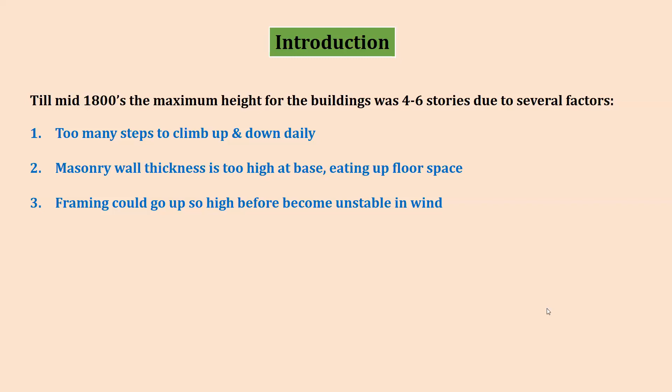So if we target these three things, it was really a challenge for them. But thanks to the industrial revolution, which happened almost 150 years back, these two gentlemen actually initiated the process.

The first one is the Bessemer process, invented around 1855, which induced the industrialization of steel production from pig iron. Steel is a better material from the structural stability point of view, so we can think of an RCC or steel structure which can now go a little higher without compromising the thickness at the ground level.

The next one is Elisha Otis, around 1857. He invented the brake shoe of the lift. The lift was already invented, and he started a company called Otis Elevator, which is still alive. Now the elevator is in practice, and it gets rid of the problems of climbing up. As steel came, better types of glass also came as a byproduct of the industrial revolution, so framing glass even at high levels won't be a problem.

So these two inventions ignited the possibility of the high-rise building, and by virtue of that, around 1885, about 30 years down the line, the first so-called high-rise building came up in Chicago, which was a 10-storied building, 42 meters in height.

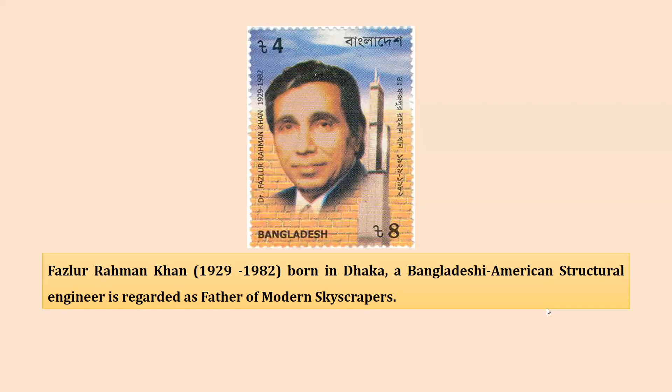In the 70s, when there was a boom in high-rise buildings in the USA, he developed the structural concept which was the fundamental concept of high-rise building structure. Fazlur Rahman Khan, F.R. Khan. This is a kind of postal ticket which the Bangladesh government developed in his name.

If you see the height of the building increase, the structural steel required to take care of the gravity load increases in a linear manner. So if you increase by 2 floors, whatever increase occurs, increasing another 2 floors gives the same amount of increase. But it is not true in the case of lateral load. It increases exponentially after a certain height, and it will take over as the dominant factor between these two. Fazlur Rahman Khan called this excess amount of additional steel required to take care of the lateral load the 'premium for height' — you have to pay some premium because you are going high.

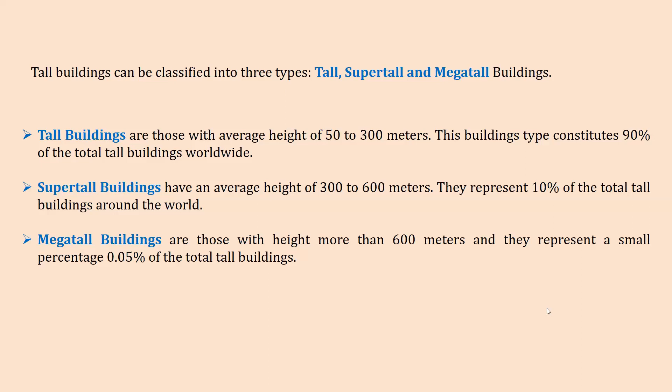So what happened is that in the past 120 years or so, there was an array of modifications, an array of inventions, and an array of influencing factors which actually boosted us and are responsible for the growth of tall buildings.

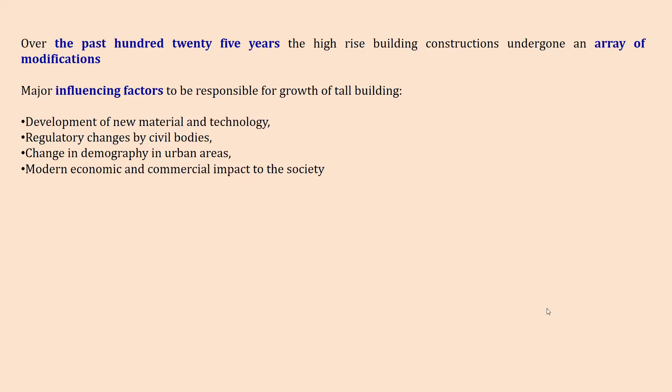We have developed a lot of new materials and technology. Regulatory changes in civil bodies also gave boosting to think for high-rise buildings. The change of demography in urban areas means we need a lot of buildings, and urban areas are spreading out. The city core areas now have very high land prices, so the character of the building is going to change. The modern economic and commercial impact on society also impacts this. Per capita income is increasing, especially in urban areas, so that is another cost people can afford.

The other important point is software technology development. The recent advancement of software technology, particularly in designing, modeling, detailing, and management. Tall building design is not a joke—it's not like hand computation can handle everything. You need a reasonable kind of software to develop these designs, then go to simulation models for wind load and other factors. These are now available, so you can do a lot of exercises and then go for the best performing option.

Now let us go to my part, the services principles, and how we are going to think about this. One major point is that the design of a tall building is group work. A conceptual development can be generated in the architect's office, but it has to be vetted through the structural counterpart and also the services counterpart. Then again, rethinking and re-evaluation is needed. This cycle goes on for several more times, and then the particular building can come up. That is the first very important point.

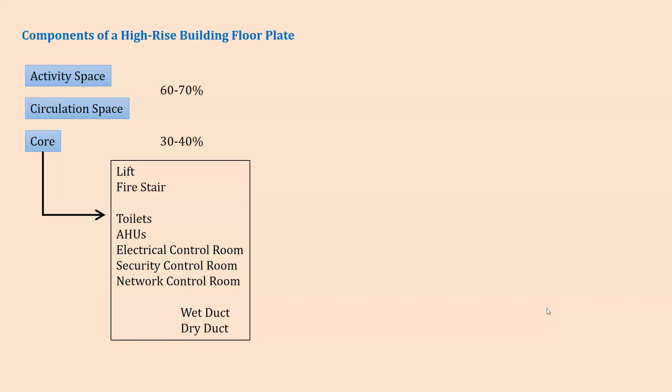Now in the core, we will try to put the lift, fire stair, toilets, AHUs, air handling units, electrical, security, and the network control room. These require some kind of vertical transmission, so we need a wet duct and a dry duct. The wet duct takes care of my sanitary and water supply pipelines, whereas the dry duct can take my HVAC, electrical, and network cable. So like that, we have to design.

Now, if you see this core, for all the items you first have to find out how much area will be dedicated for each item. For the lift, suppose, then we need to know the occupancy, the total height of the building, what will be the speed of the lift you are designing for, and what will be the cycle time.

So like that, we have to actually see what is the waiting time and all. Then we may go for 3 lifts, or maybe 6 lifts, 8 lifts, something like that. And once we know the dimension of a lift, we can find out how much area is required.

Similarly, the fire staircase is also governed by the bylaws. Number of toilets is also governed by the bylaws. AHU will be governed by the cooling load that is required, so from that we can have some kind of idea.

Maybe the security and network rooms may not have any bylaws, but a tentative dimension has to be fixed for them because it is something like a room, and there are instruments, cables and all these things that have to be housed.

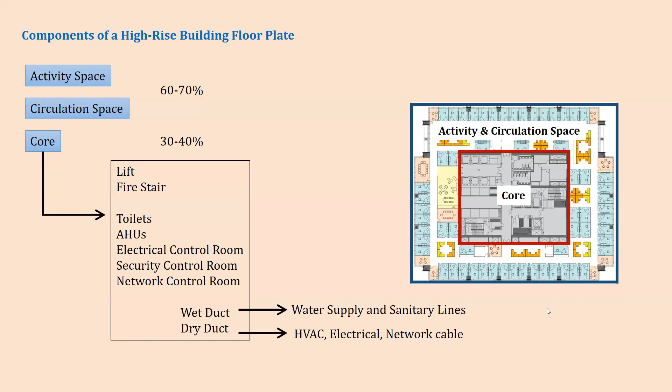Because I know my plot area, I know my FAR, so I know how much square foot or square meter area I can build, and I know how many floors I want. From that it's a calculation, and then I will deduct the amount of core which is necessary for a high-rise building, and then I will be left with the activity areas, and then I will start thinking of the shape and other things.

Next, I prefer to first design the core of the high-rise building because that is very much governed by the FAR, which gives me the total height. From that I take 60% as my activity area—office space, hotel space, apartment, shopping area, business area, or whatever. Then I know from the guidebooks what will be the total population.

So from that I can understand what will be the number of lifts per floor, how many occupants will be there, and how many toilets will be there. So like that I can actually design. I can make some dotted line grids, and by virtue of that I can place something.

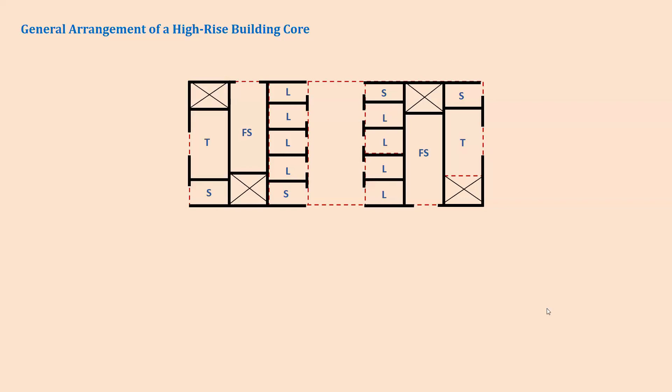Yes, this can be my lift, core and other things, and then I decide that this is my T, which stands for toilet space, S stands for services area—I may give some electrical room, HVAC rooms and all these. L stands for lift, FS stands for fire staircase, and there are some passages. Then I decide these are the dry duct and wet duct, and the wet duct will definitely be very near to the toilet.

The dry duct will definitely be in between the service spaces like electrical service, HVAC and other network services. So we first design it, complying with the space and number of lifts through logical understanding and calculations, and then we start thinking of designing the activity areas and the circulation area.

In the general layout of the circulation area—sorry, this is supposed to be the core area, just demarcated as the red area, as the core and the services and the lift. The blue one is the wet duct and the yellow one is the dry duct. Then I need some circulation area, which I've shown in green.

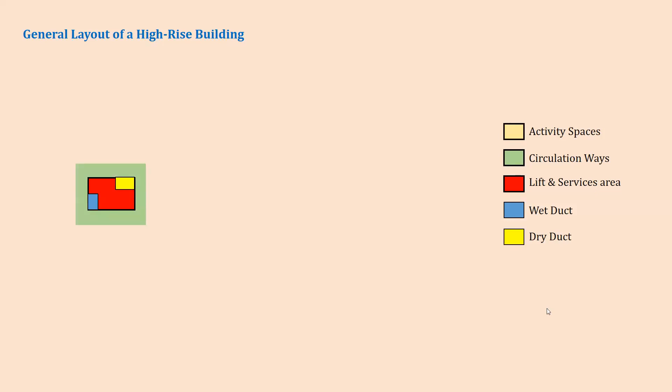Then I have some outer area because that is my maximum floor plate as per my FAR recommendation. So this is the activity area. And then I may need some more circulation space because I want to make it into four different parts for four different offices or something like that. So gradually I will go like that.

So I'll go like this, I'll design this one. I know this much of the circulation corridor is required—this I will get from my FAR calculations. And then I need this kind of circulation.

Sometimes, maybe in some floor, I may not need this thing. Maybe I can get rid of these two, only these two will be there—okay, fine, because this is too large an office or whatever. Like that, I can now change accordingly.

So like that, I can have a single core, single kind of thing. I may have a double core system if I want to have a rectangular kind of thing. So the general layout is now possible. Now this way, gradually I can develop it.

So in our course, we used to give the students something like this after teaching this much portion—we give a small class exercise. You are given a plot, suppose this is an office building, and this is the FAR, and you need to go this much high, maximum height is this, and then what should be your concept of the core, how much is your activity area, and how you stagger things. This can take around 3 to 4 hours; sometimes we dedicate a weekend and start giving them this kind of small exercise.

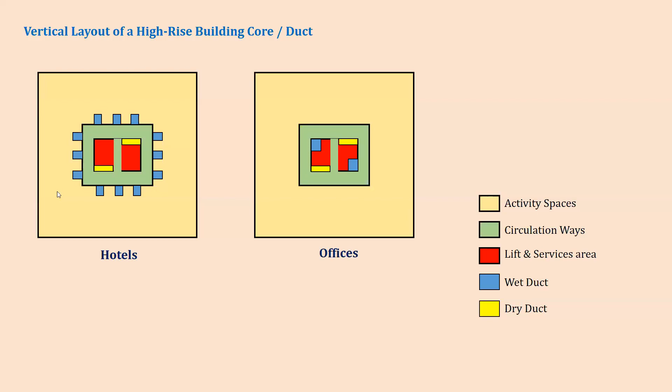So now the problem is, if I go to the next slide, I'll find a problem. If this is the hotels, my section of the building will look like this. You see the blue ducts are at the end, the fag end.

Now if I have the high rise, the upper floors are of the hotel, and the lower floors are of the offices. So the blue ducts are something like this. The upper 5, 6, 7, 10 floors are the hotels, so the ducts will be perimeter duct, and the offices are the central duct. Something like this. Or it may happen because of a change in the character of the high rise.

If it is a mixed use kind of thing, how do we do this? We have to actually introduce a gap between them, and then take the duct by virtue of some kind of horizontal movement and then connect it to the central one. The perimeter will connect to the central one, or sometimes the reverse, the central one can be connected to the peripheral one.

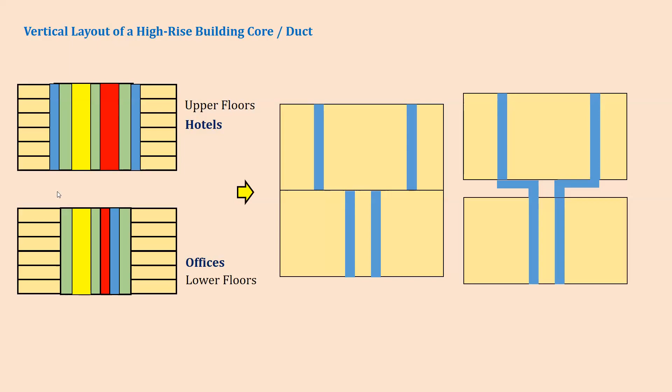And this is called the service floor. We need to have some kind of service floor required in this particular case. Even though suppose all 40 floors are offices or all 40 floors are hotels, still you require, at regular intervals after 15 floors or after 10 to 20 floors, maximum 20 floors, a service floor is required.

Because pumping the water from the ground level to the 40th level is not that easy. So you have to pump at different service floors, and each service floor will give discharge to the lower floor by gravity.

That's number one. Number two, suppose you think of a wastewater pipeline and you flush your toilet from the 40th floor, and the water passes from the 40th floor to the ground floor. Can you imagine how much pressure the water will have? It will burst at the ground level.

Because of the gravity, it is actually coming down from a 40 floor height, 40 into 3 or 3.5, almost about 120 plus meters. So what will be the velocity of the water at the ground floor? Very high, and because of that it will thrust and break the pipe.

So you need to actually take the water down 15 floors, 20 floors, and then have a kind of chamber which will take the flow in a horizontal movement. The velocity will go down, and then it will flow and overflow again. Like that, we have to step down the water and go on.

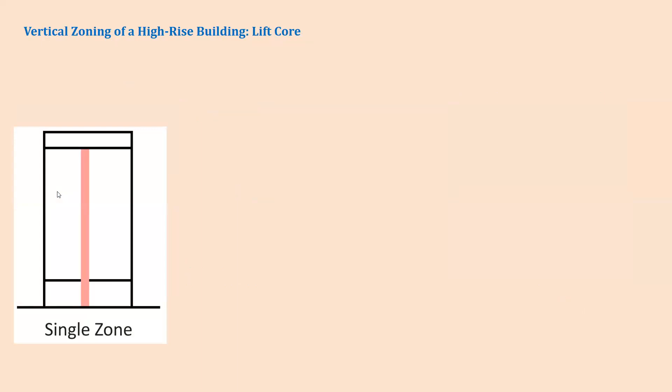In case of a lift, it can be of different types of zones. You can divide it into a small height or the regular 10 floor, 15 floor building with a single zone. In case the building is more than that, you can have two zones of the lift, because one particular lift will take too much time to climb to the 40th floor or so.

But in case of a tall building, we may have multiple zones. So multiple zones are there, just like we take an express train to go somewhere and then take a local train to go to a nearby village. Something like that, we can take an express lift to go to the 20th floor and take a local lift to go to the 23rd floor.

Something like that can be arranged. So there is a non-stop lift from 0 to 20 or so, and from 20 to 40 there are two such non-stop lifts. If you want to go to the 26th floor, you take the 0 to 20 express lift, and from 20 to 26 a local lift.

So in this case, there is a kind of dedicated interchange lobby, where the change from the express lift to the local lift happens. That particular zone is called the sky lobby. So the sky lobby is also important.

If your building is so high and you are designing a lift, first definitely we'll try with a two zone or single zone scenario. Sometimes it fails because of the waiting time and occupancy load, so the cycle time becomes too much. So we have to break it into different zones, try 2 or 3 alternative cases, and then take the best one. So this is the sky lobby.

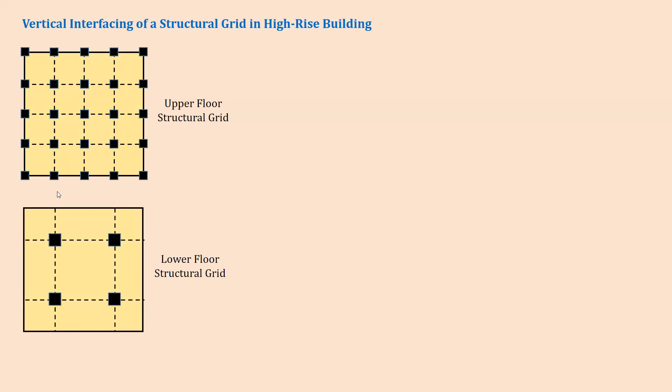But in the lower floor I may not require that. I may have large banquet halls, or maybe auditoriums or large offices. So my structural grid will be different, maybe the thickness of the column may increase, but there is not so much of the footprint, so then again the same problem occurs.

So there are so many columns in a group of floors, and in the lower floor there are only four.

So here we need a particular floor where those columns or structural footprints transmit the overall dead load to the next layer by some kind of a deck or girder to the next layer. This intermediate floor has to be constant, and it is called a transfer floor because it transfers the different loading pattern up and down through a particular girder.

This is required in tall building design because most tall buildings are mixed use buildings. They have different structural footprint requirements we have to take care of, since we cannot take the same structural footprint all the way from top to bottom. So you need a transfer floor.

A sky lobby and transfer floor can be the same, but by definition they are different. A service floor and a transfer floor may be the same too - no issue, because I can have the typical height requirement and in the transfer floor the beam depth will be a little high, but the area in between two beams I can use for any service requirement like horizontal pipe bends, water pump stations, and HVAC units. By definition they are different, but both can be clubbed together. That's why I need frequent interaction with my structural associate and my services associate to design these things.

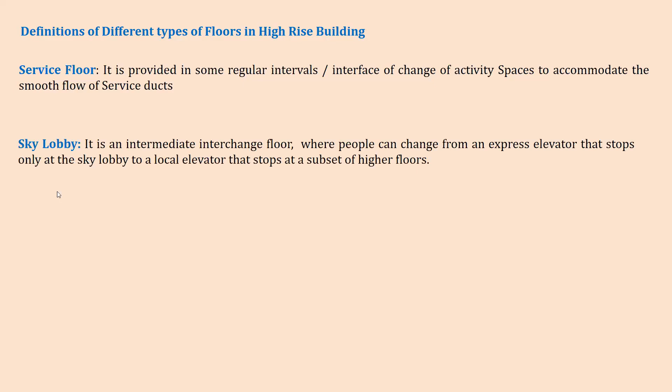The transfer slab is also a kind of floor system which supports the vertical as well as the lateral load balancing system to two different structural grids.

There is also another floor called the refuge floor. It is a dedicated area for emergency gathering, particularly in time of fire, so people can rush there. In case of fire I have to take the fire staircase, but it's not possible to run down from the 40th floor to the ground floor at once. So I may come down from the 40th floor to the 35th or 32nd floor, and that floor is a refuge floor - an evacuation gathering space which is fireproof. It is also required.

So these are the four such spaces, and there may be various permutations and combinations possible. Now if you see the core configuration and tenant distribution, it looks something like this. You can have a central core, which I discussed earlier, or a split core with two parts of the building, or an end core at only one end of the building, which is very efficient because the whole area can be used for rental space.

We may also have an atrium kind of core, where there is a central atrium and the core is actually in the atrium. You can have a single tenant, a double tenant A and B, or multiple tenants A, B, C, D. So you can make different types of groups and arrangements, and your circulation space can also be arranged accordingly.

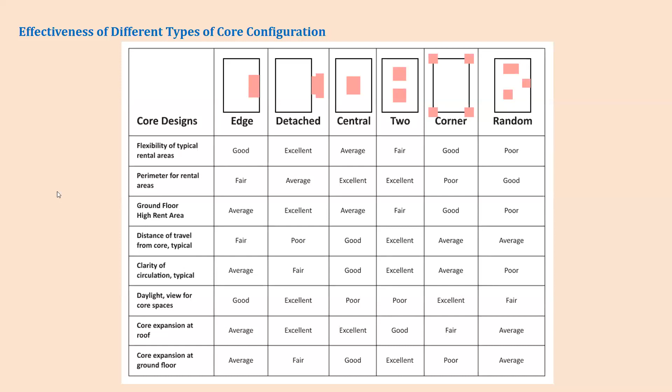The ground floor high rent areas, the distance travel, and all those factors - excellent, poor, fair, and average grading can be done. We can discuss this with our students so they can see which particular core system they may choose, from the structural benefit and from the architectural designing of the spaces. Suppose they go for the corner core - then the perimeter rental areas are kind of poor in that sense, or maybe the core expansion at the ground floor is also very poor. So that way they can choose any type of configuration for their design.

Now let us discuss some of the structural systems of tall buildings, because the structural system is another important point which may not come under the services, but it will decide your total configuration and the services systems also. Sometimes you need a typical type of structure, the shear wall, or some other type of system which is mandatory to provide, where there can be a conflict between your service core and the structural system.

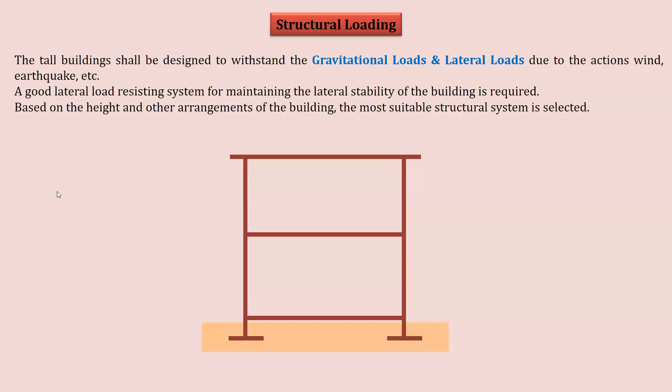As we all know, the building is going to have dead, live, and some kind of wind or lateral load, or maybe earthquake. Wind and earthquake we call lateral load, and dead and live we call gravity load. From the structural point of view, if we see a tall building, it's like a pendulum, or it can act as a cantilever beam supported at the ground. So we need to know how much is the lateral sway, the induced vibration. Both wind and earthquake are time-dependent loads, so there is going to be vibration - you have to see how much is the bending, how much is the swing.

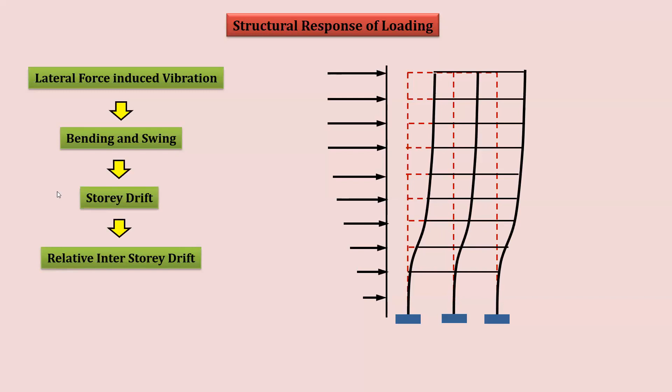We may not actually know that one because we are not structural engineers, but we need to discuss in depth with our counterpart to know what type of structural system he or she is going to adopt. From that, I need to see my activity areas and my core areas. Then there will definitely be a story drift - we cannot avoid that. Even if you go for a rigid material, there will be some elastic behavior in any material, so that part will have some kind of shift. Then a lot of forces will be induced, and then strain, stress, all these things will be there.

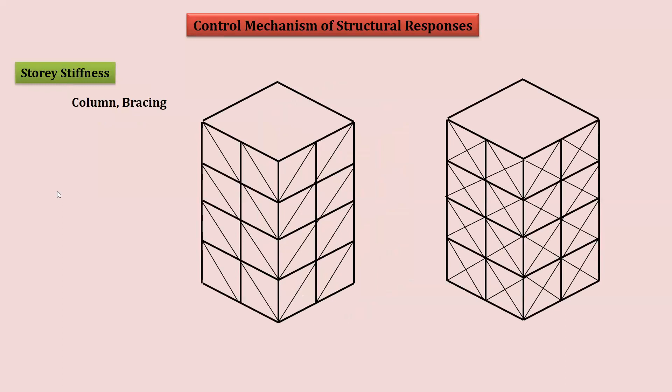Now we have to see the member stiffness - we have to ensure that each beam and column should have stiffness. If the floor stiffness or the story stiffness - it's not just the member now, you have to see the overall stiffness of the story. So you may introduce some kind of bracing to increase the stiffness of the overall story, because bracing will be connected from one beam to the other beam, so one floor. Sometimes one-way bracing will be enough, sometimes you may have to go to two-way bracing in the perimeter. Then sometimes we need to go for more type of bracing with the belt truss, so you can have some kind of belt in different vertical parts of the building.

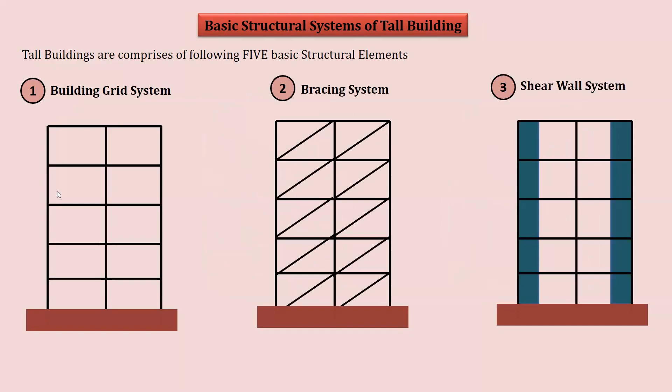Then in the tall building, we have to see the 5 basic structural elements. One is the grid system, what we are going to have. Then the bracing system, what I have discussed. Then we need to have some kind of strategic location shear wall that will boost the stiffness of the building, and take care of all the kind of lateral load.

We have to see the load transfer mechanism also, which we have already discussed. Then you have to see what will be the foundation system, whether it is a raft only, a pile, or a raft and pile, or sometimes you may have to do some kind of soil improvement technique before going for the foundation. So that has to be discussed.

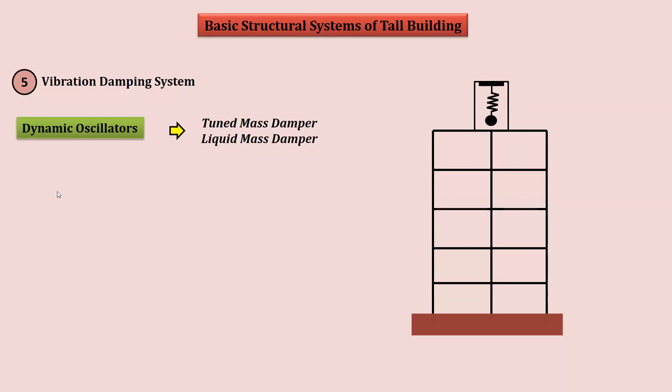Then we need to know the vibration of the building because of earthquake or wind. We need to have some kind of dynamic oscillator systems also, like a tuned mass damper or liquid mass damper, which can be placed at the rooftop or top floors. Sometimes we may go for energy dissipation devices in the bracing systems, which can be frictional dampers, metallic dampers, or viscoelastic dampers, or sometimes we may go for base isolation.

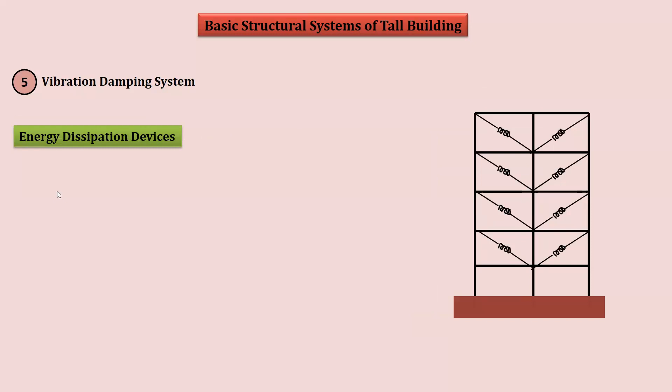So we can isolate the building from the foundation. This isolation is better adapted in seismic areas, not for wind. But the energy dissipation devices and dynamic oscillators are better suited for both seismic and wind activities.

Based on these fundamentals, we can divide the whole lateral system into two types: the interior system and the exterior system. Of the interior system, we have rigid frames and vertical trusses. It is called interior because the major part of the lateral system is actually inside the building, and in the exterior system the major part is outside, creating a kind of box. Sometimes we may go with a hybrid.

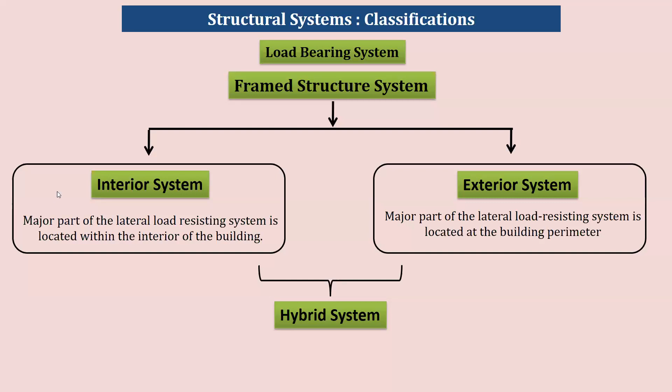So this is the interior kind of system, where the systems are imparted in the interior of the building, and this is the exterior system, where there is a tubular kind of system emerging out from the exterior. From 1970 onwards, this tubular system was developed by Fazlur Rahman Khan, and it has a greater benefit from the load bearing or load resisting point of view.

Next, let us go to the fundamentals of MEP design. MEP is the colloquial term used in case of high-rise building services. M stands for mechanical, which is mostly HVAC and fire extinguishing systems. E stands for electrical, and P stands for plumbing - mechanical, electrical, and plumbing design.

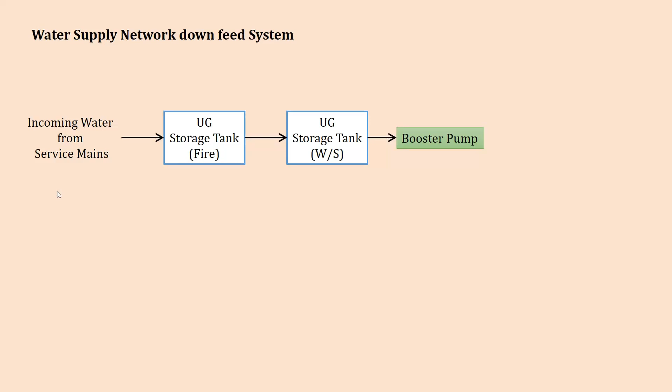So as you see, there is a water supply network. We actually get water from the service mains, and we need to take it to the fire tank first, then the overflow of the fire tank goes to our storage tank, which may be underground. Then we can have a booster pump also, which takes care of the underground water. Sometimes I may not have sufficient supply from the mains, so I need my own water booster from the underground, and then take it to the overhead tank and then to the distribution pipelines.

This is the nature of the total system. This is how it will look in a high-rise building - in the basement or some other area you need this kind of booster pump to boost the water from some level. You may get it from the underground, or sometimes you need sufficient water in your underground storage tank, and from there boost it to the different floors.

So how do we design it? National Building Code Volume 2 gives fundamentals of the requirement, or you can go to IS 1172 for the basic requirement of water supply and sanitary systems. We need number of people, population, building type, type of water connection, community factors, and availability of flushing systems, and we can decide the total consumption and total requirement of water. Then we distribute it into various service zones, and we put different capacity tanks in the different service zones.

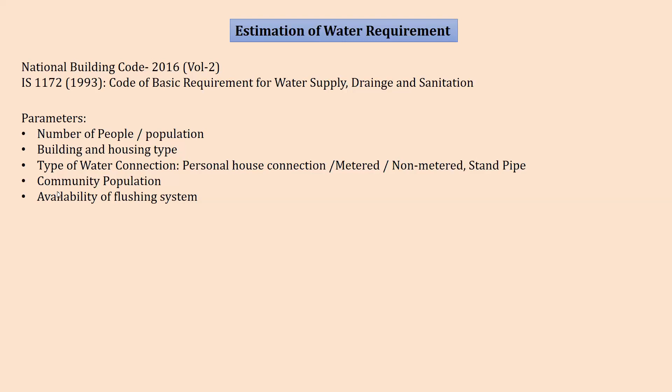So we have to know about the pipes, joinery, valves, and all the accessories. Mostly it will be done by our consultant, but we need to also see through it, because sometimes there may be issues. We may have some past experience which gives bad efficiency or those kinds of issues.

So we can actually discuss that. So those are some of the materials and the remarks I have noted down, and the nominal pipe sizes.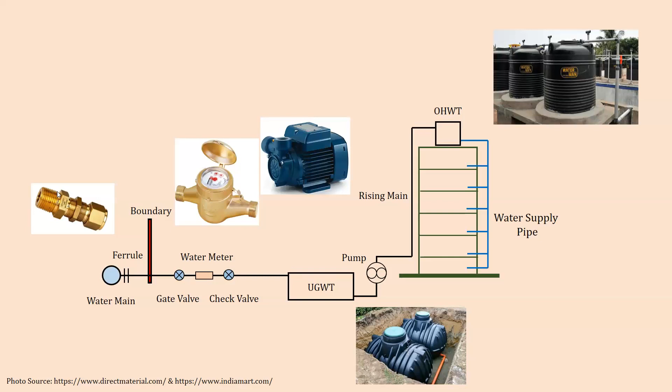Next is the air conditioning system, where we have to go with the comfort temperature, relative humidity, air quality, and all, which is one of the essential systems for our high-rise building, and it will also consume a lot of energy. Almost 30 to 40% of the energy will be consumed by the air conditioning system.

So we need to know what is my set point temperature, and design how much is the total cooling load. For that we need to know what will be the standard humidity level to maintain, and what air quality doesn't come with that, but still we have to see what will be the fresh air exchange rate to maintain good air quality, and the air movement distribution patterns also have to be checked.

So from that point of view, I can discuss with my HVAC consultant what type of system they are providing, that we have to know.

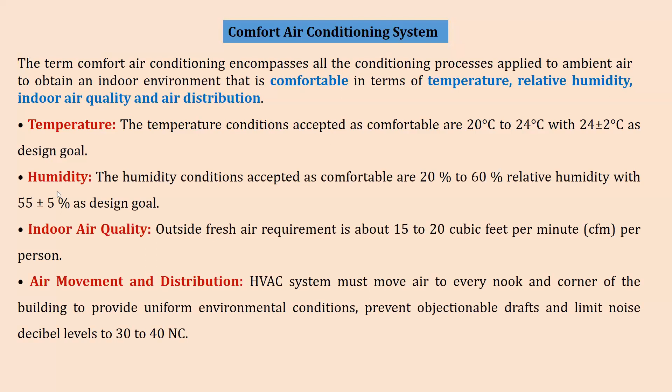Now in case of the HVAC system, this is very important. There are few issues we always encounter, even for horizontally spread buildings also, like what is the total air conditioning load. We always need to see that this particular air conditioning load is one of the governing factors to take the decision of which type of system I am going to purchase or design for my building.

Then the next one is the design of the building. How is my floor plate designed? What is the total spread of the floor plate? I know that my dry duct is located somewhere in the central position, so from there I have to circulate the whole air conditioned, treated air to different locations.

What is the remote location, and how much is the pressure drop? Theoretically we can place it, no problem, but there will be a pressure drop, and due to the pressure drop, there will not be that much ventilation, and the air exchange will not be proper. So there may be some kind of discomfort.

Then what is the proximity to the surrounding buildings? That is also important, because we have to take a decision since it will create some kind of heat effect outside the buildings also.

The height, visibility of the equipment - sometimes it looks very bad that all the air conditioning systems are exposed outside and visible from the outside. So how to take care of that? At the time of design, you have to place some kind of terrace area, and we have to somehow hide that particular part with some kind of ornamentation or something like that.

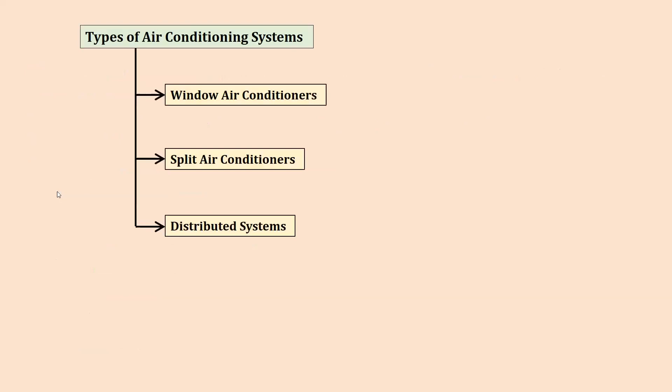So in a holistic manner, we need to see what systems can be taken. Now if you see the type of air conditioning system, the first two are very basic that we usually put in our residential building or in our institutional areas, but these are not going to work in tall buildings.

Split and window air conditioners are very uneconomical and not at all efficient in high-rise buildings. We cannot think of a window air conditioner or split air conditioner in shopping malls, because it is a huge amount of cooling load. It will be very uneconomical, and the efficiency also will not be good.

So you have to think of some kind of distributed system. In large scale cases, we go for the distributed system. We have air cooling systems, or sometimes we may go with the refrigerant or water cooling system.

This is very interesting. The air cooling system is a little old fashioned, where we have two types: constant air volume system or variable air volume system. Constant air volume means every duct takes the same amount of air, the same rate of air exchange. Whereas depending upon the need, we can have a regulator and use a VAV type system. But at the end of the day, in this air cooling system we are cooling the air and sending the cool air to different parts of the building.

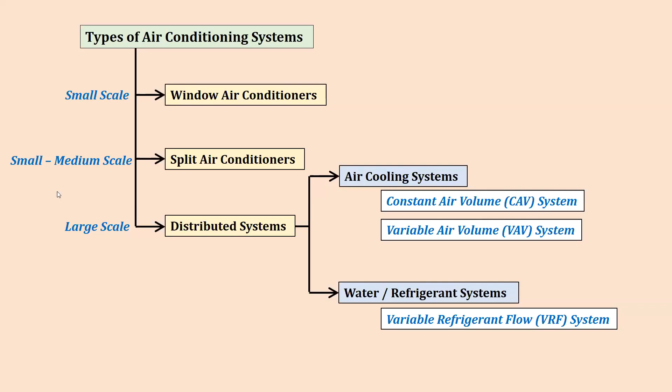Whereas in the second system, the water or refrigerant system, it's not the air but the refrigerant or water that is chilled, and then the chilled water or chilled refrigerant is sent to different parts of the building. Air actually flows in and around that heat exchanger and gets cooled, and the total area gets cooled through that air. This is called the VRF system, the variable refrigerant flow system.

Let us see the air cooling system, how it is done, which is very traditional. We have a cooling tower, a chiller plant, some cooling coils, valves, etc. This is part of the instruments which is actually housed outside. We take intake air, and that will be chilled thoroughly, and then sent to different air handling units in different parts of the high-rise building, different floors.

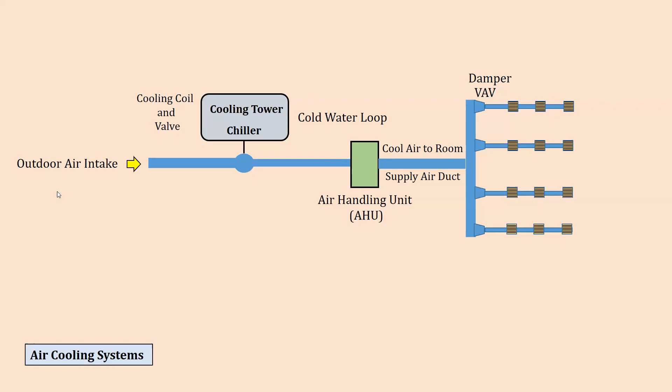And then from the AHU, a supply air duct will take the cool air to different rooms, and when it is entering a different room, we may put a VAV damper. What is VAV? Variable air volume, that kind of damper which you can regulate, and that takes care of the particular temperature or flow rate.

After this, we should have a return air duct which will take the slightly warm air after circulation throughout the room, warm and humid of course. The return air fan will draft the air, force it directly back into the intake air area, and this total process will be recycled. In the next cycle, maybe 30% of the return air and 70% of the fresh air are mixed together, and then we follow the system.

So this is the typical nature. The centralized air conditioning plant is huge. The VAV system is a small instrument that has to be hung properly in the duct, with some kind of monitor or regulator which can adjust the volume flow of the air. And the AHU units are placed on different floors, with a pump that circulates to different parts of the building.

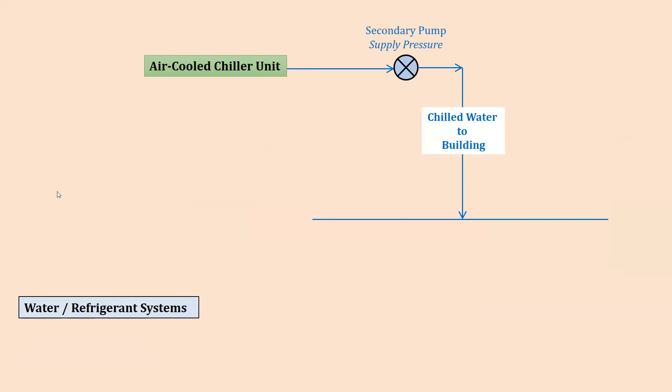Now, what kind of refrigerant systems are there? We have a chilled water unit where the chilled water or refrigerant comes to the building, shown in the blue lines, and this goes to the fan coil unit in each locality. There won't be as huge a duct because the volume of air is too high, whereas the volume of water will be less, so it will just be a pipeline.

So those pipes will be connected to the FCU, fan coil unit. The fan coil unit will look like our split air conditioner, and from the room, the hot air will actually suck into that particular fan coil unit, and it will go through this coil, through which chilled water is passing, and the treated cool air will come out. Like this process,

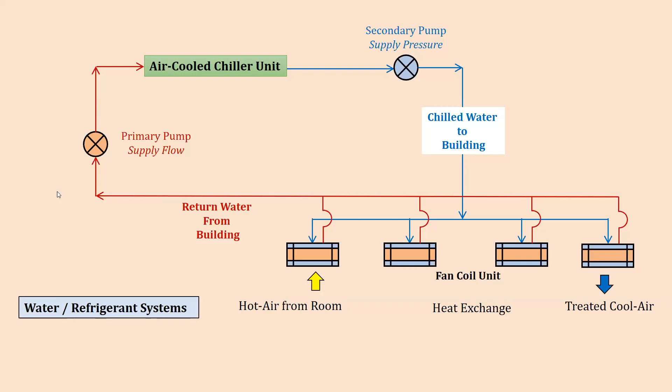So for a large scale building where there is a huge spread out from the AHU or from the central point, the air cooling system will fail, because you need to have a huge amount of duct sizes, and that will take up a lot of area, also a lot of headroom and all those. So because of that, it is better to think of this kind of refrigerant system.

So a rooftop unit can handle a particular building. This kind of rooftop unit can be placed in the service floors, the refuge areas, or maybe the transfer floors, at a dedicated point. And there can be one, two or three depending upon your total cooling load. This can be placed in different parts near the dry duct, and you can take the refrigerant for that dedicated bunch of floors.

The last one is the electric supply. The electric supply in a multi-storied building is a little different with respect to other types of buildings. Actually, we get the electricity, or we can generate electricity on our site by virtue of some kind of DG set, or we can purchase electricity from the local electrical utility company. So from the LEUC, we can have the generator also, we can have a transformer, we can have that kind of power backup system, and we can have some kind of internal distribution system.

So we need a main electrical switch room or control room which houses the switch panel, because sometimes in our country there may be some problem with electricity. So my generator or that particular system will feed me. So this two-feed system, one is from the power houses, that is the state power authority, and also from my own generation—that switching system can be there.

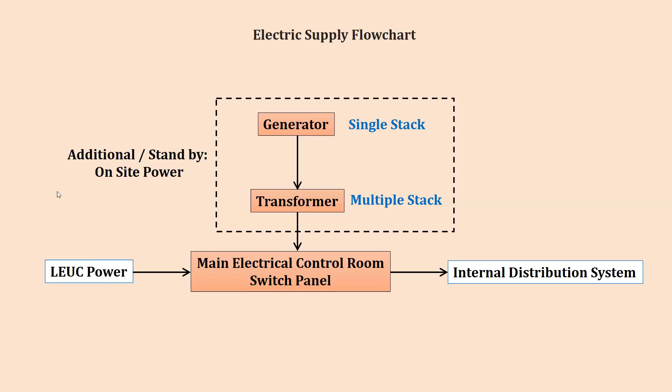Nowadays there can be a third arrow also in this point: that is the green energy, where maybe we can have some kind of solar panel, so we can actually take that one also into our main control panel. So this is the primary feeder which comes to the transformer, which takes it to the main electrical switchboard, which houses a lot of circuit breakers, electrical meters, etc.

Then this will go to the distribution board, and this distribution board, as you know, is divided into floor-wise, zone-wise, and load-wise. Floor-wise, we understand each floor should have at least one. Now zone: each floor, depending upon your distribution, suppose you have 4 tenant areas, you have 2 tenant areas, so you have multiple zones. So one dedicated for the floor and one each for the zones.

After that, the load. In each zone there may be different types of loading: there may be electrical lights, there may be electrical machines like computers and other things, there may be other things like some kind of air conditioner or machines, and other type of equipment. So based on that, there are different loads, and in each zone there can be further bifurcations depending upon the load. Then from the distribution box, it will go to the different appliances, and branch circuits will also be there. So this is a general kind of understanding now.

My electrical consultant will tell me where is the suitable location for the distribution box on each floor, if he or she is planning it zone-wise or so. Sometimes that particular distribution box is placed in a very odd area, suppose at the entrance or at your visual sight lines.

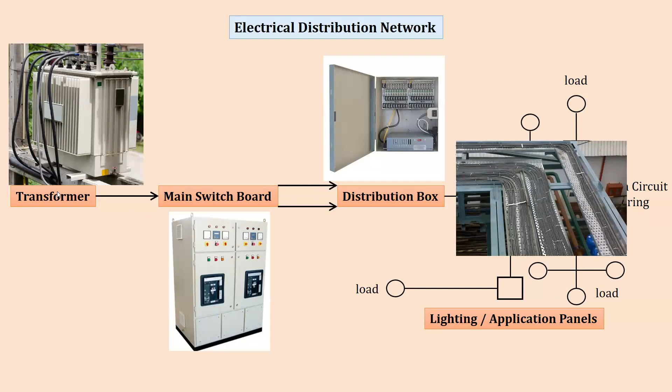So this is what the electrical control room looks like, and these are the systems. As you all know, it has an electric meter, and it will have some kind of MCB, RCDs, and MCCBs, and all those.

We have a lot of electrical load points - appliances, fan, computer, pump, machines, etc. You have some control unit like switchboard, ceiling roses, etc., and you have some kind of cable and duct.

So if you see, this is the schematic diagram where I have shown an electric meter and an MCCB - moulded case circuit breaker - where the sum total of all the loads has to be taken into it, and then it will go to the MCBs in different floors, and then it will be connected. So in case of a high-rise building, we will go with this.

So each floor we have a two-pole MCB or maybe RCD, and then this MCB bank and neutral link. So this is what they are going to design.

But if you see, it is complex. If you just want to see the number of sub-circuits depending upon the total distribution of load, the number of cables you require to channelize from the MCB bank to different parts of the building, you need to think about this, because otherwise you have to place some dedicated area in the corridor.

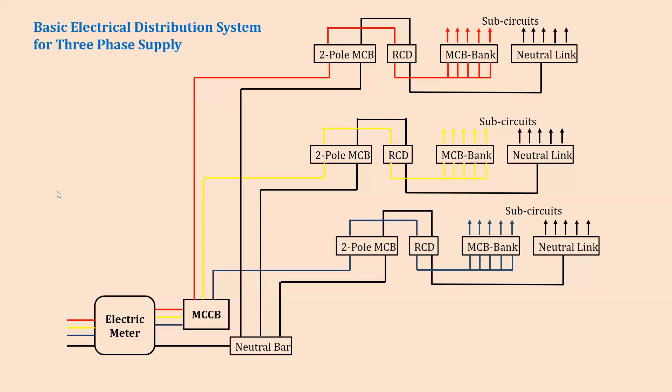So LAN connections and all. You also need to think of the running horizontal pipeline for the air conditioner, the chilled water, which also has to be wrapped with thermocol or other insulator. So it is pipe and then there are thermocols also.

So these are some of the points we need to know. You have to know the layout of the apartment building or any building, the activity plan, furniture layout, and electrical gadgets. Like that, we have to decide. So this is what one of the floors will look like.

They will give you the calculations, like how many MCBs need to be installed as per the ampere rating. This whole calculation is not our job, they will do it. But we need to oversee that it should not foul with our other counterparts, like the AC counterpart or the network counterpart. So we need periodic discussions.

So like that, it will go to the other floors. This is for the ground floor, suppose. As I told you, the ground floor in this figure has 4 zones marked as 16 ampere 2 pole MCB. Suppose I have divided the ground floor into 4 zones, I may divide the first floor into 5 zones or 3 zones, depending upon my need.

So like that, each floor has a particular zone division. Ground floor has 4 zones, and from each zone there are 5 MCBs of different ratings - 3 ampere, 6 ampere, and 10 ampere. Definitely the 10 ampere will be linked with heavy duty machines. The 3 ampere ones may be linked with the lighting systems. The 6 ampere ones may be linked with computers and similar things.

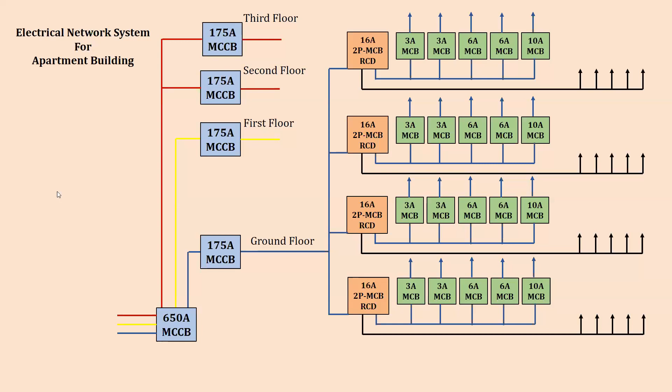Thank you, sir, thank you so much. That was a very detailed presentation. You touched so many different points related to high-rise buildings and services as well. Everything was very detailed, very clear, and you explained it in a manner that it was understandable to each and everyone. Thank you so much.

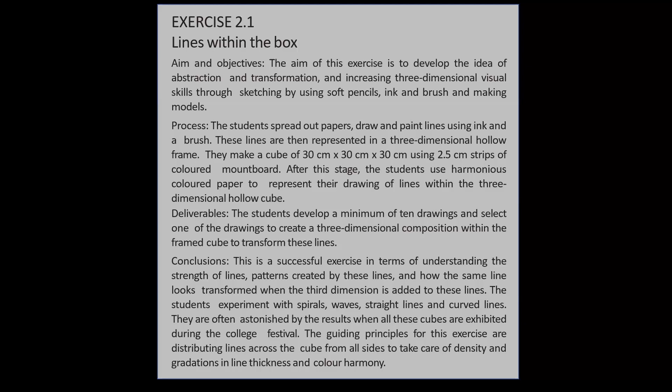This is the exercise called three-dimensional visualization of lines. The aim of this exercise is to develop hand and eye coordination, increase command over freehand drawing using different mediums such as pencils, pens, ink, brush, etc., and to develop visual skills in transforming these lines into the third dimension.

The students draw or paint lines close to each other using a flat brush, 6mm thick, dipped in black or blue ink. The lines need to be parallel to each other, and the distance between the two lines should be equal to the thickness of the brushed lines. The figure and ground should have the same weight.

They make several drawings, select one, and visualize these lines in the third dimension by drawing sketches of the same. The students make a minimum of 3 drawings that are shortlisted for visualization in three-dimensional space. One drawing is used to make a model to transform these lines. After completion of the model, a window is created in a small piece of cardboard to look at the model from this window, and this view is then drawn on paper.

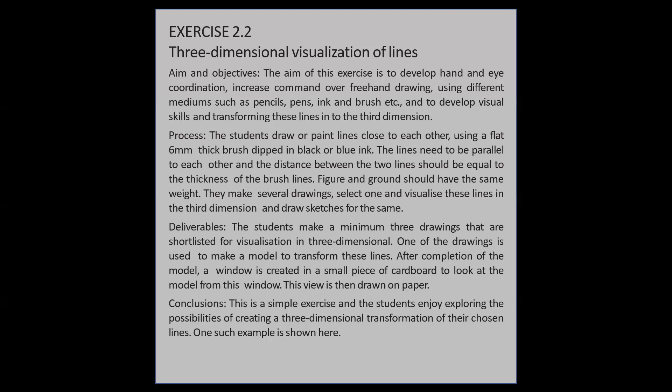A very simple example of lines where he's using a flat brush, trying to keep the distance between the line and the white space the same.

It's one of the most beautiful models, and this boy was very talented. When he brought the model, he brought it in a wooden box. I said, wow, this is something.

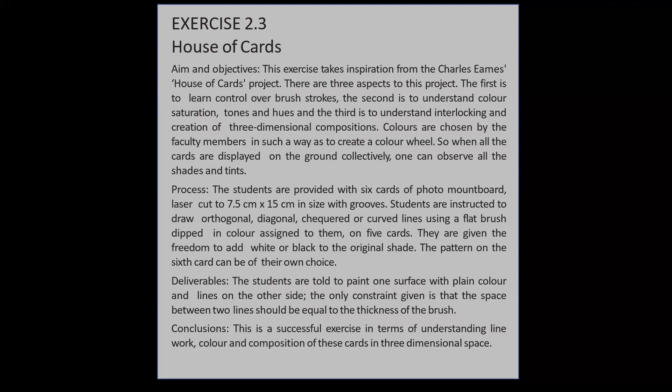This is a successful exercise in terms of understanding line work, color, and composition of these cards in three-dimensional space. These are the cards displayed on the ground, spread out, all beautifully colored with gradations of colors. These are the various compositions that the students made. It's a fantastic project. They made compositions using contrasting colors, displayed these cards, and created another composition, and another beautiful composition.

This is an exercise which is theoretical work, talking about basic design elements around us. Aims and objectives: the image matrix on the next page is given only as a trigger point for further inquiry and imagination of the students and faculty members.

First year is a period to develop minute observations and representation using various mediums. On the next page, we have given different images of basic design elements found in nature, arts and crafts, industrial design, art forms, and built form. Using a similar matrix, one can develop a number of projects which are outlined here. These projects are quite simple to execute but have a profound collective impact on the students' minds. When these projects are displayed and discussed simultaneously, they generate many points of deliberation.

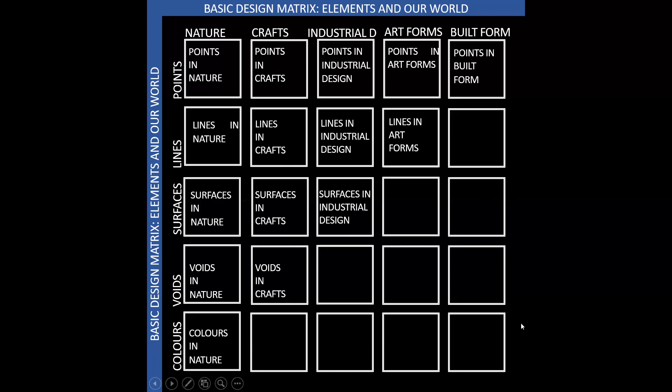Here I have chosen examples all from nature. This is all the macrame work that I have done so far. This is the industrial products of the chairs. These are all the paintings and sculptures by Piraji Sagara, and this is a beautiful bungalow designed by my friend, the very famous architect Nitin Kilawala. So you can see the point, the lines, surfaces, voids, and colors.

So you can talk about the same thing, the matrix of basic design explorations, principles, and art forms. We have drama, dance, painting, sculpture, and cinema. And we have contrast, centers, balance, rhythm, and repetition. So repetition found in music, repetition found in cinema, and so on. You collect these images and stick them onto the black mount board to create a matrix.

Experiencing space. Aim and objective: this exercise includes 4 rods of 2100 mm length and 4 long curtains of 4.2 meters by 2.1 meters in size, in modules of 1.05. The curtains are tied to the rods to create a mock-up room.

The process: one can start with a very small room of 1.05 by 1.05, and then go right up to 4.2 by 4.2. The students start with creating the smallest room and use newspapers to create furniture layouts, and one by one they experience this space from within.

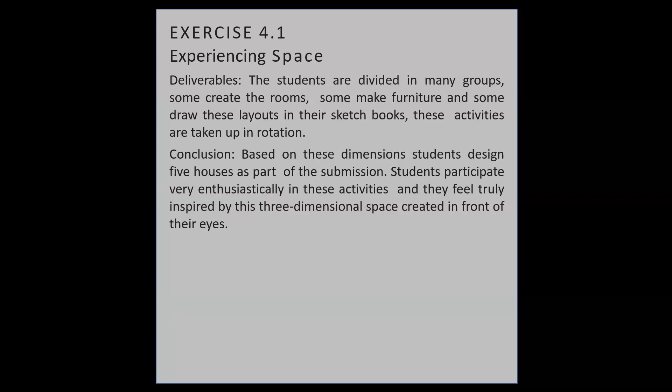Now this is an exercise about solids and voids. This project was designed and developed by me. I have taken a perfect 10 by 10 by 10 units cuboid space and extracted perfect cubes from within. I looked at the cube from all four sides. This was a fascinating project for me, and working with layers was the key to this project.

The views show the entire process of construction in layers, starting from layer 1, 2, 3, and then adding subsequent layers in every image. The idea was to subtract perfect cubes from four sides, either 1 by 1 by 1, or 2 by 2 by 2, or 3 by 3 by 3 units, or 4 by 4 units. Plus there was a void of 2 by 2 units going through the entire cube.

When I started thinking about this project, I decided to place many constraints on myself. I wanted penetration from all sides, connections between the voids, and repetition of similar voids. Balancing the solids and voids was the main idea behind this exercise.

Maybe this was a space for ants to live in and travel from one place to another, or maybe it was big enough to accommodate small creatures. They could crawl inside the cube and enjoy this space. I started with a unit of 1.2 meter by 1.2 meter by 1.2 meter, and then the entire cube could be 12 meter by 12 meter by 12 meter. The smallest space for sitting could be 1.2 by 1.2 by 1.2. Working space could be 2.4 by 2.4 by 2.4, or it could be 3.6 by 3.6, or 4.8, etc.

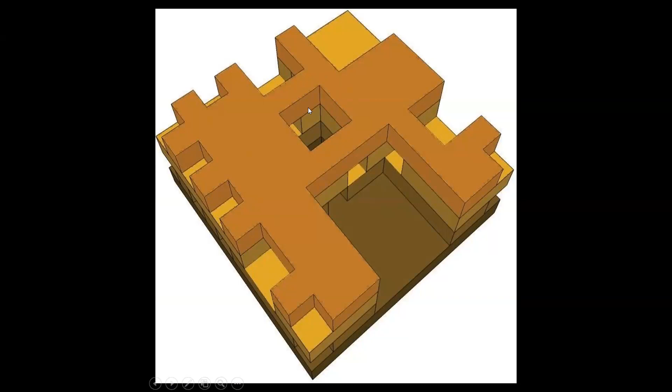And then these are more layers. This is the top view, and this is how the entire cube looks from one side, and the other cube looks from the other side.

Playing with a dice, another project designed and developed by the author. This was another exploration of space and creation of windows and bridges within the cube. The dice has a very interesting system of numbering on its 6 sides, where the numbers on the opposite sides add up to 7. The idea was to create voids for numbers on the outer surface and tunnels and bridges inside the cube. Notice the numbers carefully.

One can see that the center position of numbers 1, 5 and 3 is the same. One can create a bridge from inside for connections. Also notice that the corner position of the numbers 4, 5 and 6 are the same. For number 3, the corner matches the position of 4, and the center matches with 1 and 5. For number 2, the alignment is in the center. Actually, there could be connections from outside the cube and inside the cube.

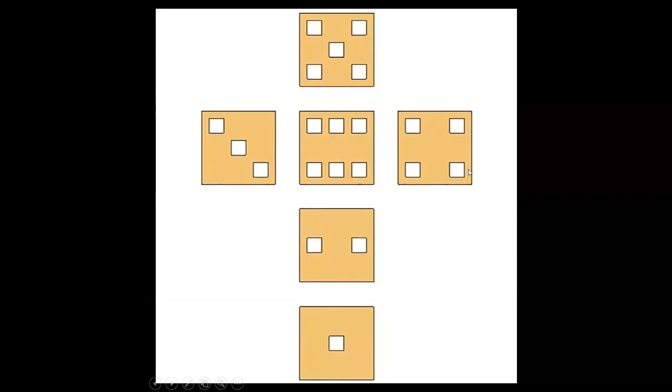These bridges will create very interesting patterns for this cube. So this is how the dice looks, which is opened up. You want to have 6 on one side and opposite is 1, you want to have 5 and 2, and 3 and 4. And this is how the cube looks. So you can create the bridges and connections inside, or you can have the bridges outside.

Exhibition space for the visually impaired. The idea was to create a composition of dots and lines, planes and surfaces, and extrude these lines to create three-dimensional space. The students create compositions using straight lines, curved lines, dotted lines, circles, and right-angled triangles. The next stage is to extrude these lines to create floor levels, walls, columns, etc., to create spaces and a pathway for people to move around. The aim is to create an exhibition space for the visually impaired who would be walking barefoot while experiencing textures on the wall and on the floors.

Deliverables: create at least 6 compositions using harmonious color schemes, extrude the lines to create space, make a process model and then the final model.

This exercise starts with a little hesitation due to the ambiguity of creating exhibition spaces for visually impaired people and for experiencing textures. Only after the parameters in terms of number of curved lines, straight lines, dotted lines, and circles are given do the students grasp the project. Creating compositions and extruding these lines is a major step to crack this project.

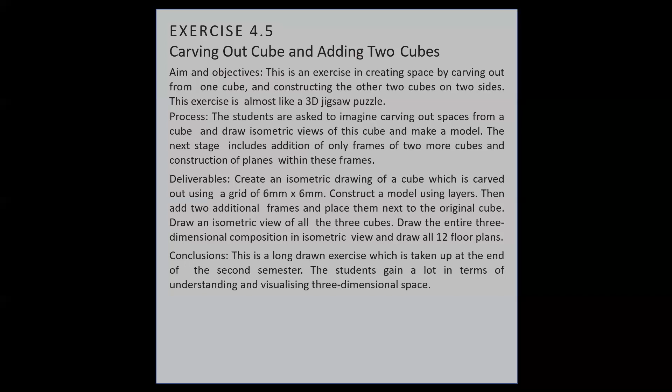Playing inside the cube. Aim and objective: to create play spaces for small children within the cube. This cube could be placed inside a mall where children can play under supervision and parents can do the shopping. The students are asked to study children, the way in which they play and run around.

The students are given a cube. The size of the cube is 4.5 by 4.5 by 4.5, and then they make a scale model. The next stage is to design spaces at different levels within the cube, where the kids can hide inside, play hide and seek, play in a jungle gym, or just run around.

Deliverables: create three-dimensional compositions for overlooking and overlapping spaces. Make small models including one process model and one final model. Draw plans, elevations and sections using colored papers.

This is a long drawn project. Initially, there is a need to discuss in great detail, and the faculty members made a small little model to show them how this works. The students will grasp it easily.

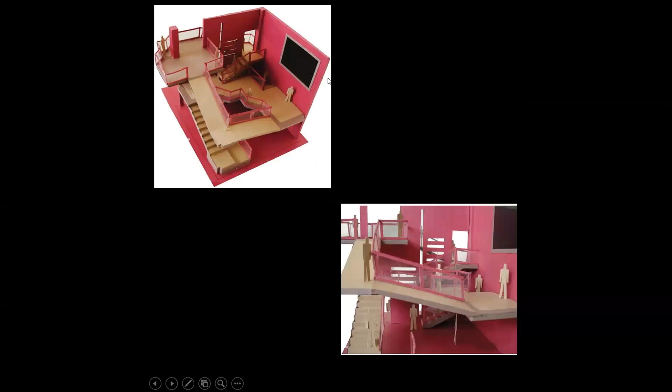This is another, same project, another model. She was also very talented, and ultimately she made illustrations for my book. So this, she stuck all these papers to make elevations. And that's very interesting.

Interplay of solids and voids. The aim of the objective is to create interplay between solids and voids, and there are two ways of creating spaces: constructing and carving.

Students are given a cube of 25 centimeter by 25 centimeter by 25 centimeter. They divide this cube in half, either horizontally, vertically, or diagonally. Half the cube is carved out and the other half is constructed. Then they need to match the lines in planes, in plans and sections, and the overall vocabulary has to be maintained. However, when one carves out, volumes are extracted, whereas when you start constructing, you add the horizontal and vertical planes.

So for deliverables, the students are asked to draw 6 isometric views so that they can examine the cube from all angles. They make progressive models using harmonious contours and colors for the facade and for the inner voids. This is a great exercise to understand the interplay of solids and voids.

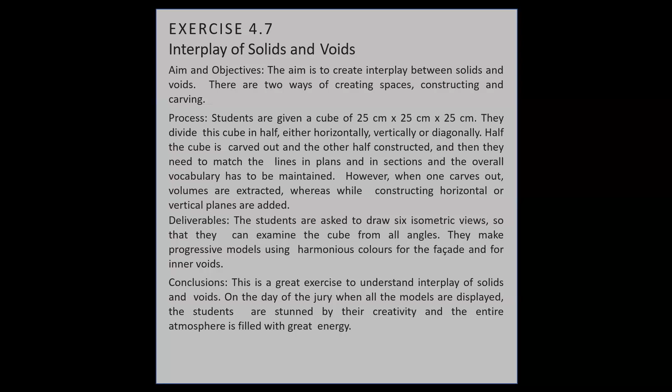On the day of the jury, when the models are displayed, the students are stunned by their own creativity, and the entire atmosphere is filled with great energy.

These are the models where you can see the horizontal cut, and these are all the voids, and these are the columns which are added, where again you can see the voids extracted. This is a vertical cut, this is a horizontal cut. You can see a clear horizontal cut here and a vertical cut here. He used beautiful colors, one for what is constructed and one inside the cube.

This was a very bold attempt. He cut this diagonally, and then added the planes and lines to not lose the essence of the cube, so the essence of the cube remains the same. At the same time, you have this diagonal, which is very bold.

Aim and objective: the project aims to understand the intricacies of designing staircases, ramps, spirals, and mid landings. The idea is to create spaces using everyday elements that we negotiate for going up and down.

The students are provided with 5 horizontal and 5 vertical grids, a 1.5 meter grid with an additional 0.3 grid given in between, and on all 4 sides a structural grid. They are expected to create stairs, steps, ramps, and pause points at landings.

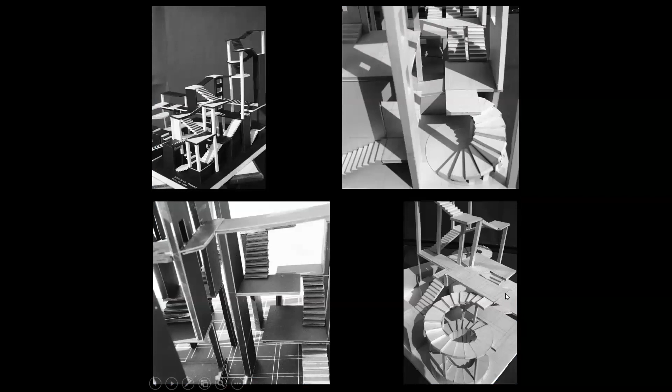So this is what the student did. They used this grid, and then created the columns, and then created the landing spaces and the steps. Look at this boy, look at the way he created this entire spiral staircase, and then this. The results were absolutely stunning.

Another example. They created such beautiful structures because they understood the structural system, because we had given them that 0.3 grid. So this is 1.2 and this is the 0.3 grid. They understood that we are supposed to use this grid to give support to the staircase, and because we had asked them to make only black and white, that also helps create that stunning environment in the classroom.

So this boy created jalis. He again made the same staircase with the grids, and used these vertical walls. Very nice, superb examples.

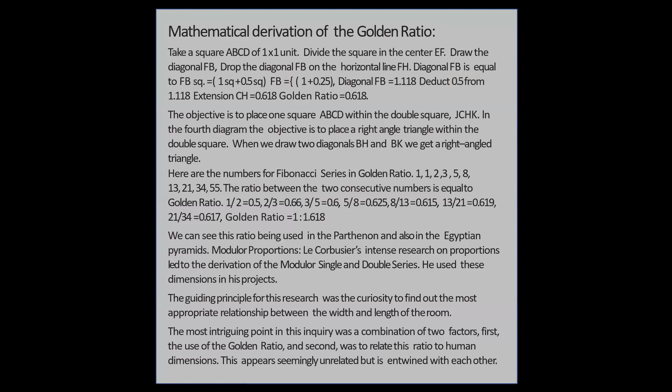Okay, so this is the mathematical derivation of the golden ratio. This goes on to explain Corbusier's theory of the Modulor and the golden ratio. This is a mathematical derivation, and this is how it works: you take a square, cut it into half, draw the diagonal, and drop the diagonal on this. What you get is the golden ratio, 0.618.

So I created this entire grid using the Modulor system - the Indian Modulor. I modified Corbusier's Modulor because Corbusier's Modulor man was 1.83. I modified that and said the Indian average male height would be 1.7. So I derived the entire grid based on that, assuming the average Indian male height as 5 feet 8 inches.

And these are the various rooms that I created using single series and double series. I'm not going into the details because it's a very detailed explanation of the Modulor system, so people who are interested can always contact me and I can talk to them.

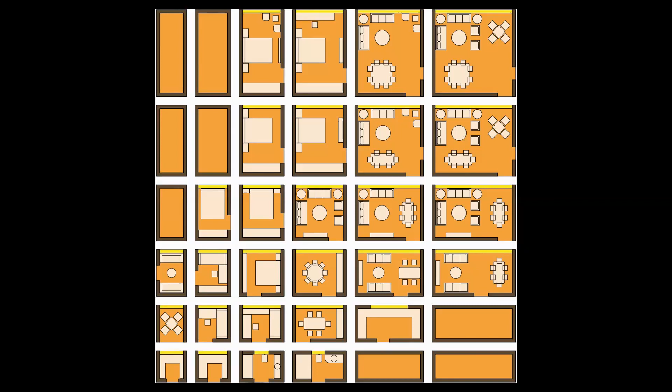This is the Indian Modulor system that I have derived. This is the Modulor man I created in macrame, as you know I make these macrame wall hangings. So this is 1.7, and when the man raises his hand it reaches 2.1. Half of 2.1 is 1050, and the golden ratio of that is 1700. Throughout my life, for making furniture, architectural drawings, and architectural spaces like windows and doors, I have used all these dimensions while designing these spaces.

Room of my own. This is a very famous pattern from Pattern Language, room of my own. The drawing on the right shows the interesting space which can be termed as a room of your own, with the dimension of 2.1 by 2.1 by 2.1. This space can accommodate a bed, a writing table, a small shelf - this kind of dream space where one is surrounded by one's own things, music, laptop, books, a window to look out from, a room with privacy.

Another option of the small space could be 2.1 by 2.75 or 2.75 by 2.75. When I was studying in Ahmedabad, the School of Architecture, Ahmedabad, I had a similar room which had my drafting table sitting on my table and a spool cassette player, and I used to play My Fair Lady songs while working. My bed was parallel to the window, and I used to sit on the bed reading a book and sometimes looking out. So this is the room.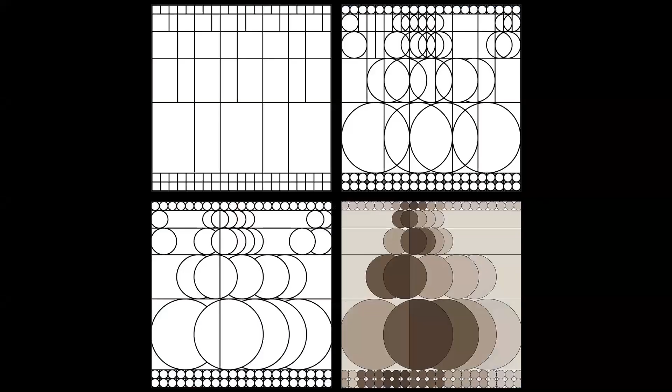This project is designed by me. Many times I've used the golden ratio to design a project. So this is a project of sliding coins. I start with a grid, then I add the circles, decide the axis, and start shading these coins.

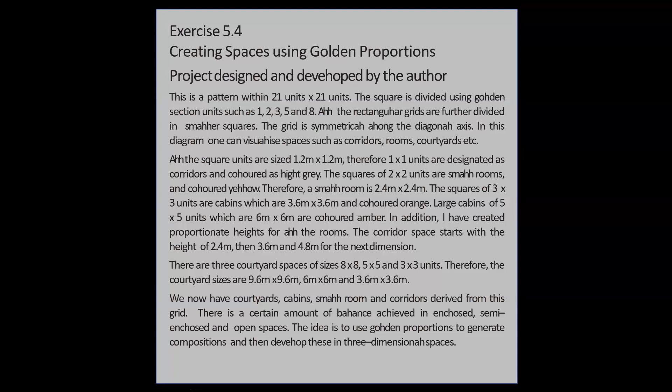Creating spaces using golden ratio. I have used this golden ratio to create spaces. I created a composition where one by one are the corridors - actually 1.2 meters by 1.2 meters. Then you have 2 by 2, 2 by 2, 2 by 2, and then you have 3 by 3, and then you have voids. So sometimes there is a solid room, sometimes there are very low corridors, and sometimes there are courtyards. You can use these dimensions to create compositions.

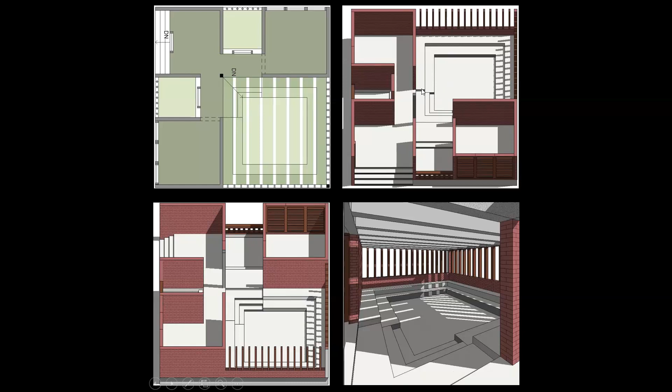Enclosed and semi-enclosed spaces. I created this composition again using the golden ratio, where you enter here, where you enter here. This is a small little space, this is another small one. You climb down here, you climb up here. This is one exhibition space, this is another, maybe a library, and maybe a meeting place where people can sit around and discuss. This is how it looks from the top.

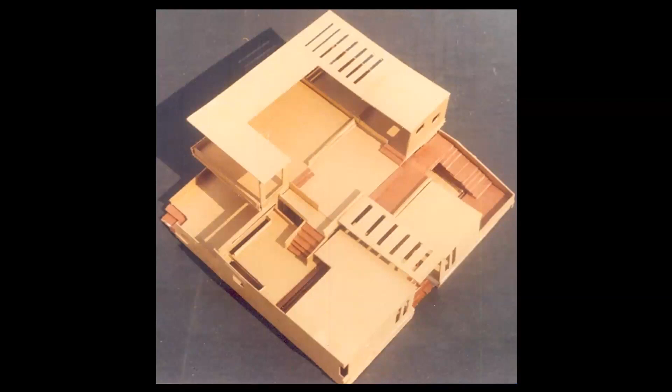Experiencing space using golden ratio. This was a project done by the students. We gave them the dimensions of the golden ratio - we had recently visited Bharat Bhavan Bhopal, so they used lots of ramps and lots of steps going up and down. We had given them a sloping site, and these are all the models.

The students really explored the spaces. When we gave them the projects, we specifically said we want to have enclosed spaces, open to sky spaces, semi basement spaces - enclosed, semi-enclosed, covered, semi-covered. We specifically asked for all these qualities of spaces.

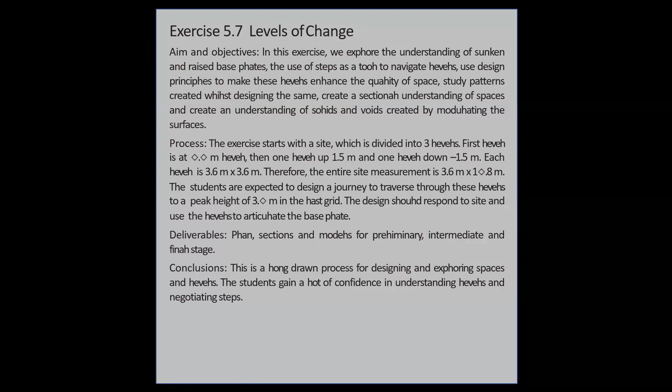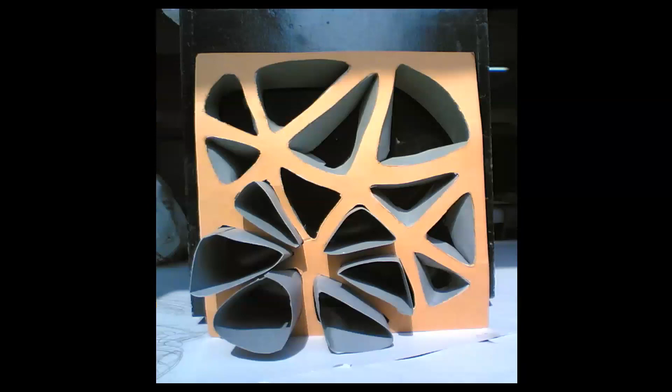She created this beautiful window space using abstraction from the fruit.

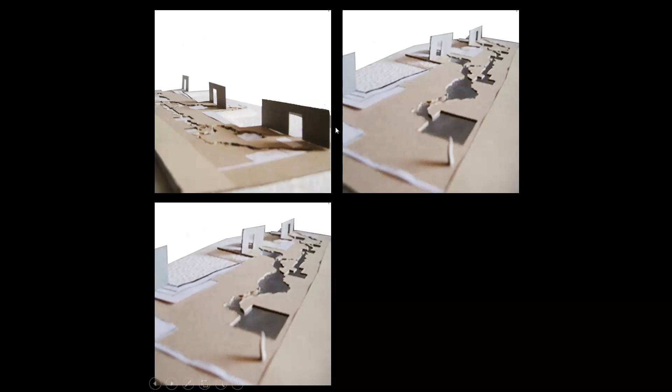I like the fact that this boy used frames and created these frames. It's a wonderful exploration.

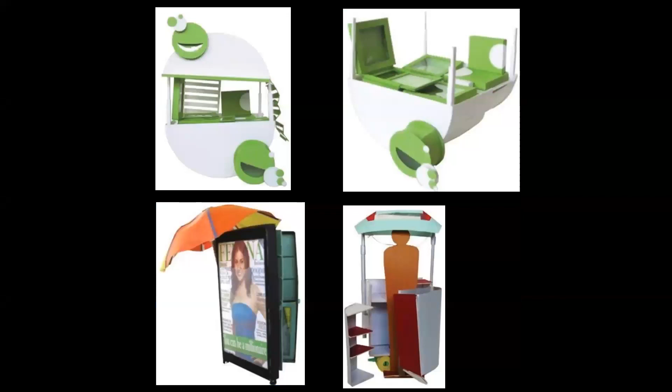He created storage units. This was another activity that we had done, a buying and selling activity. I think yesterday I had shown this project. So these are some of the explorations.

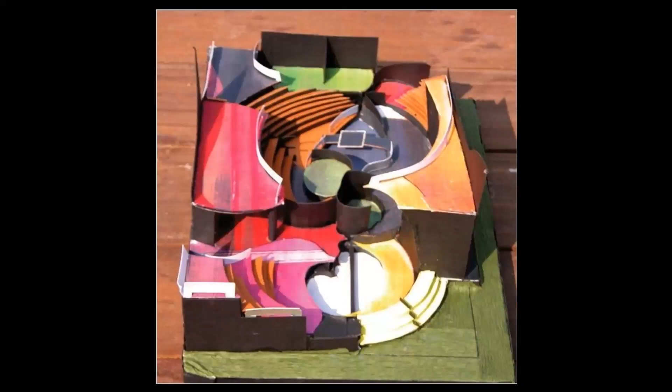So this is Alice in Wonderland, who is completely baffled—she doesn't know which way to go.

You go into the basement of this, going inside like a kund. Can you see? It's like a kund. And we asked them not to change the colors, but keep the same colors as the painting.

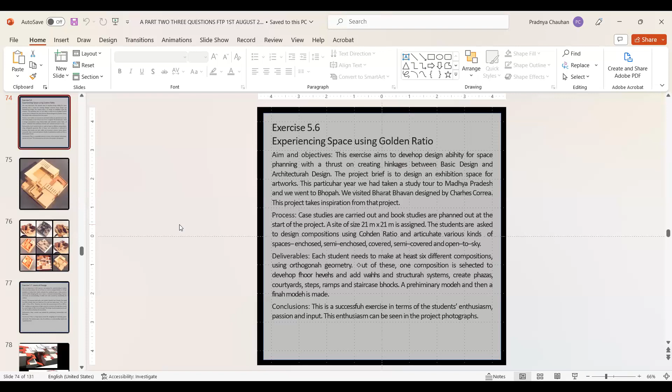The conclusion is that this is a successful exercise in terms of students' enthusiasm, passion, and input. I forgot to mention this was a sloping site, so we had given a sloping site where you enter at a higher level, exactly like Bharat Bhavan, and then step down. They created various kinds of spaces, balancing solids and voids, covered and semi-covered spaces, which was very important.

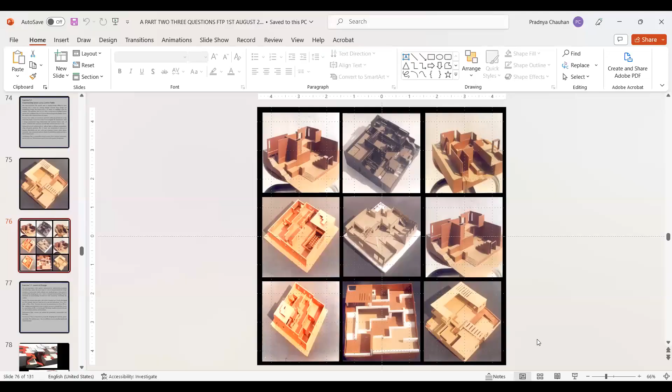For example, this particular boy was so good. Look at the kind of intricacies that he has developed. Even this is so beautifully done. So that is how we had done it.

Does it answer your question, Rakesh? Yeah, I was just very curious because it was all relating to my own architecture days, so it was nice to see this in the presentation. Ma'am, is it possible if you can share the presentation?

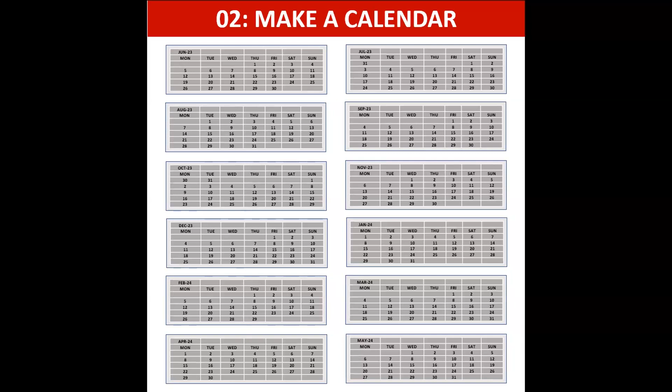And stick this calendar—I already made the calendar, so you just have to print it, cut it, and stick it. Make a box, make a stand so you can put this up. Make a cutout of mount board, stick these drawings and stick the calendar on that. You can make 12 drawings and 12 pages of the calendar.